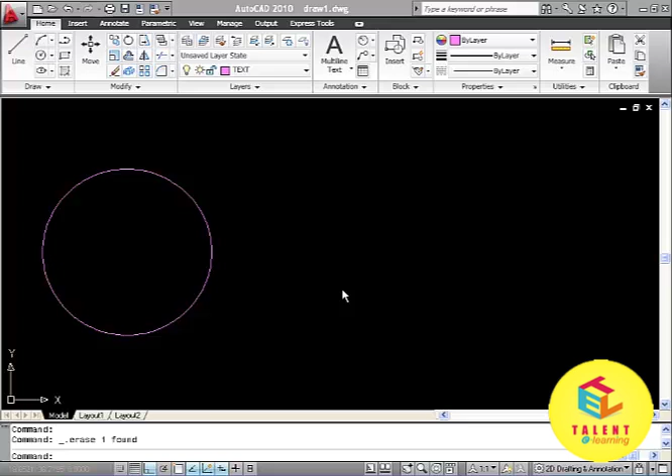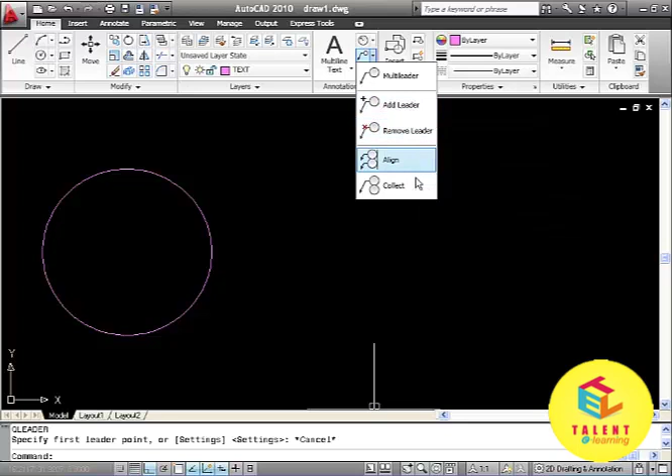The first tool that we will learn is leader. The command for leader is LE, and we can get it from the leader tool from annotation tool. It will also get multi-leader, add leader, remove leader and other options. Here we will select the multi-leader option. By clicking on it, if we select any of the object and

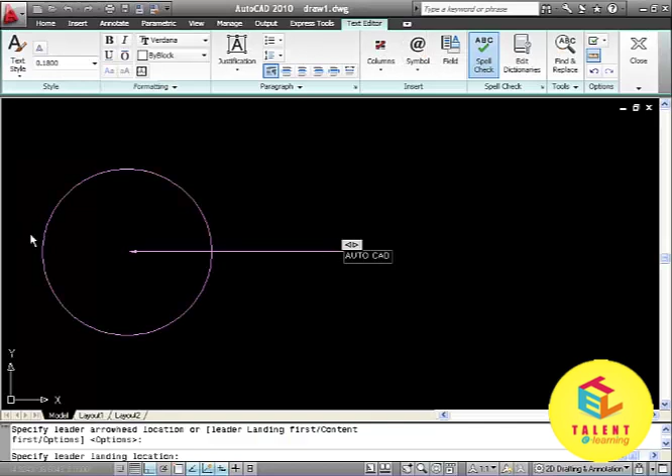drag it, then the leader will get dragged. From there we will write leader text, and once we are done, press enter or click outside. This is how we can write any directional message for an object using this facility.

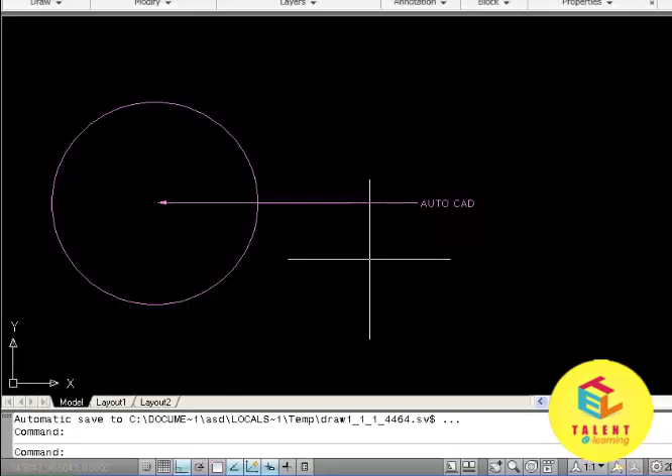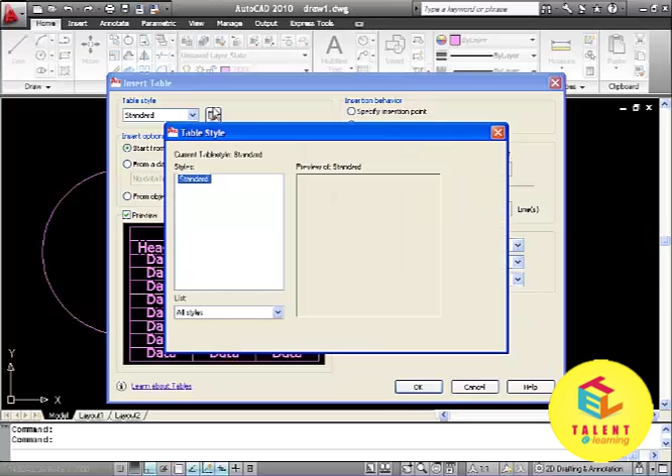The first row cell style would be title, the second row cell style will be header, and then for all other row cell styles we'll keep data. We can set the table style dialog by clicking on this button. It will open a dialog box, and then if we want to modify it, we will click on modify. Here we can specify the tool.

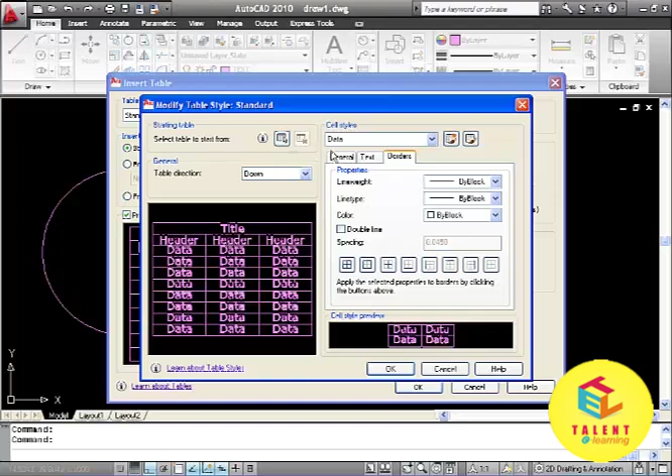Here we can specify the text and then the text color. We can specify the border style and some other important settings. After completion, click on OK to move out from the dialog box, and close to move out from the table style dialog box. Once we are done with the insert table option, let us click on OK once again to

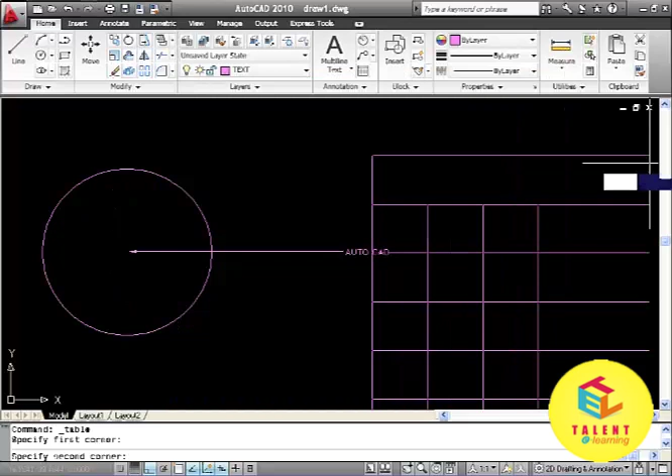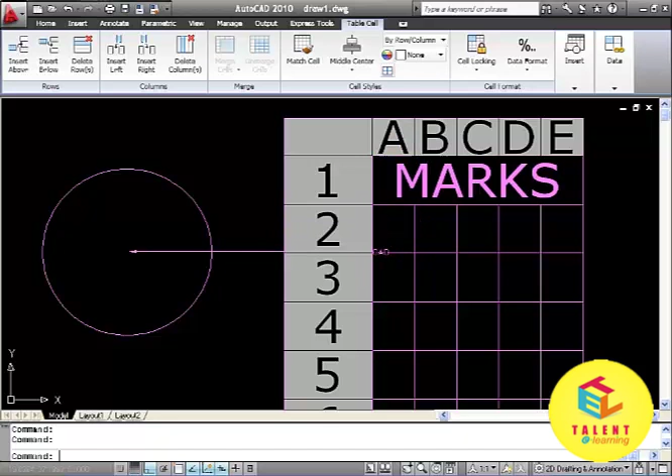get the table on the window. We will have to specify the first and second corner for the table. Then start typing the data in it. The first row would be the title one, let's say, and then in the next row, in any of the cells, we can type as per the data we require. Once we click in the table, we can type data like this in all the columns and whatever we want.

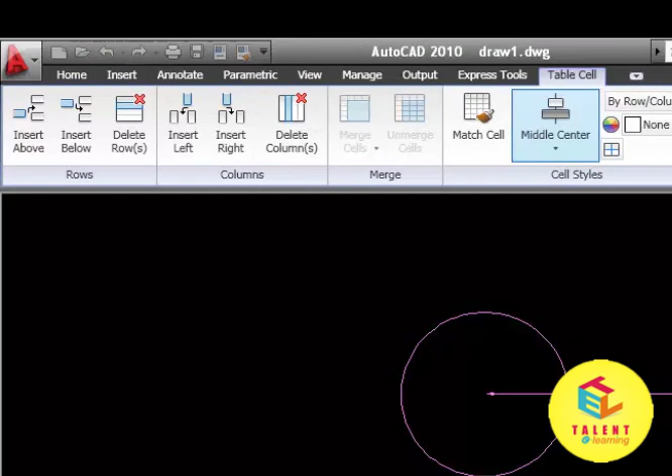Then we can have several options on its toolbar, like to insert a row, a column, delete rows, delete columns and others. It can be related to the table and text both. Once we are done, come outside the table.

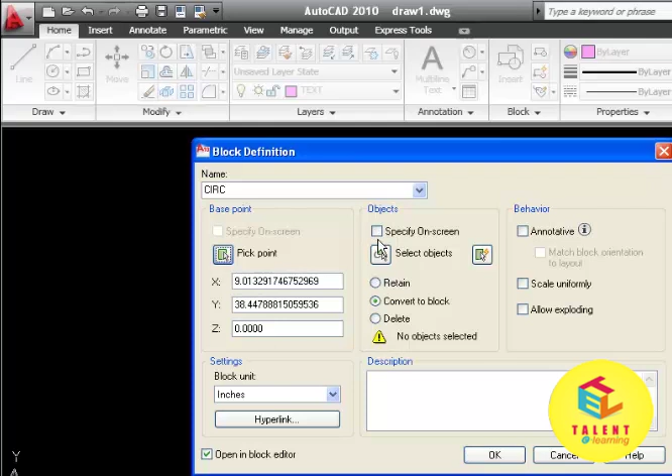Then we have the block facility in our AutoCAD. Block has two major points: one is create block and another one is insert block. Using create block, we'll create the block. Click on create block, first give the block name and then click on pick point. Then click on and select the object you want to create the block for. Press enter and click OK. The block has been created.

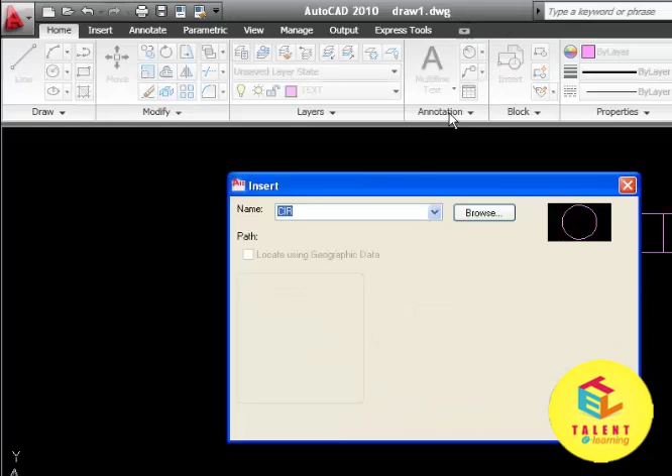Now whenever we want to insert this block in other drawings too, we will have to select it from the browse or from this drop down list. Let us select the block we have created and click on OK, and that block can be inserted at any place we want in our drawing.

This is how we will use leader, the table and the block in AutoCAD. Thank you.